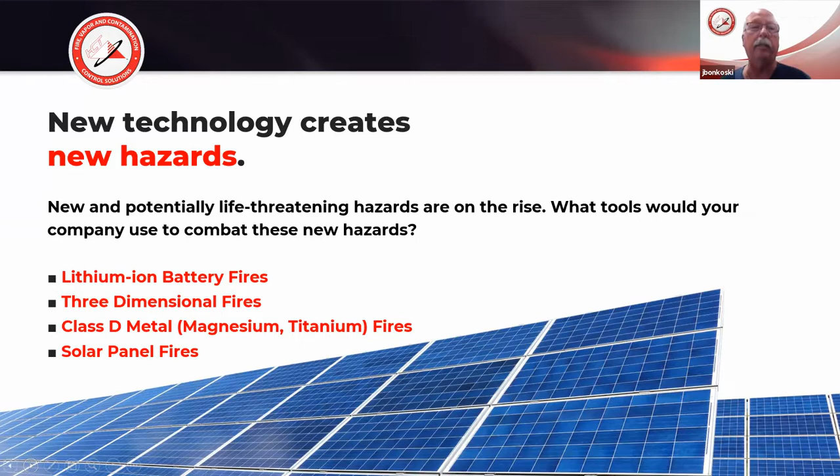So there's many applications. So when we start looking and thinking about these three-dimensional fire solutions, some of the things that we want to touch base on are the chemistry of fire and the encapsulator. What is an encapsulator? Hopefully we'll get that answered for you, the features of an encapsulator agent, some of the applications, and mostly today we're going to be discussing that three-dimensional application. So I'm hoping through this presentation to explain the differences between water, foam, and encapsulator agent, and give you a better understanding of just exactly what an encapsulator agent is and how it does in the different industries that we have an effect on.

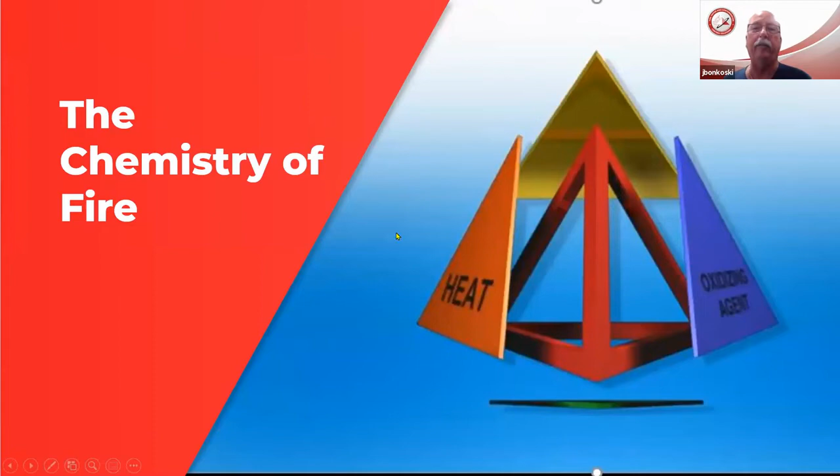Now, very long ago, when I first started in the fire service, I'm kind of dating myself, but we used to have a fire triangle. And through the years, we found out there's one other aspect, and it became the fire tetrahedron. I got a real quick video just to help explain that tetrahedron a little bit.

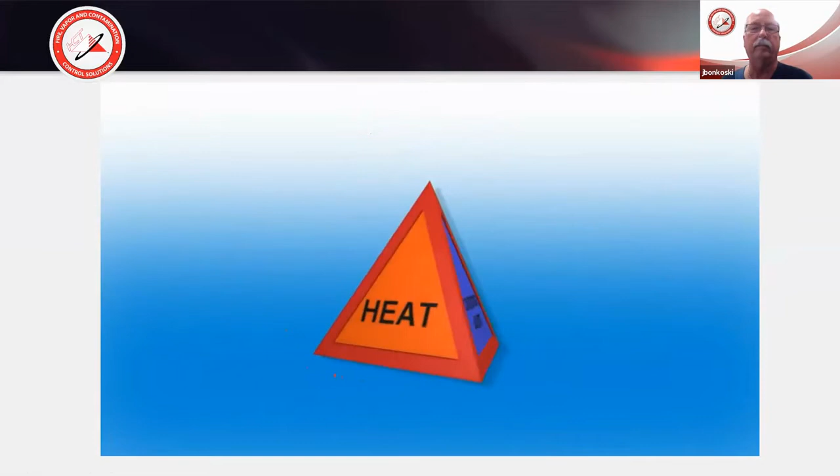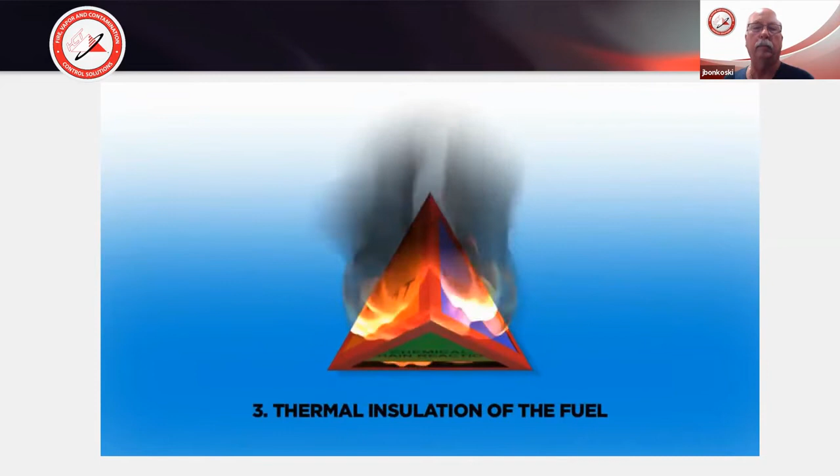The representation of a fire triangle has been replaced with a fire tetrahedron, because we now know and recognize a fourth element crucial to combustion, a chemical chain reaction. The four sides of a tetrahedron represent the four components of fire: heat, fuel, oxidizing agent, and the chemical chain reaction. If any one or more of these components are absent, a fire cannot occur. When all four components are present, fire will occur. There are four options for extinguishment: cut off oxygen, cut off fuel supply, thermal insulation of the fuel, and interruption of the chemical chain reaction. When one or more of the components are removed, the flame goes out.

Okay, so currently when we're fighting fires and we're looking at this fire tetrahedron, many times fire departments are using water. We're using water, we're converting it to steam and trying to use that steam to smother fires. It's really not a very effective way of trying to put out a fire. I mean, we're using millions and millions of gallons of water on some of our commercial structures and probably hundreds of thousands of gallons on some of our even residential fires.

So water is like 3 to 5% effective at being able to cool and extinguish. And when water doesn't work, we start looking at our foams, Class A foam for Class A fires and our Class B foams. And we're trying to smother the fire with these foams and create the blanket.

But again, what do we do when we're cold? We grab a blanket, we put it on. Well, we're doing pretty much the same thing when we use a foam blanket. We're not dissipating, we're not getting rid of the heat. So once that blanket breaks down, and that heat source is exposed to air or oxygen again, we have a rekindle, we have a reignition. So it's, again, not a really great choice.

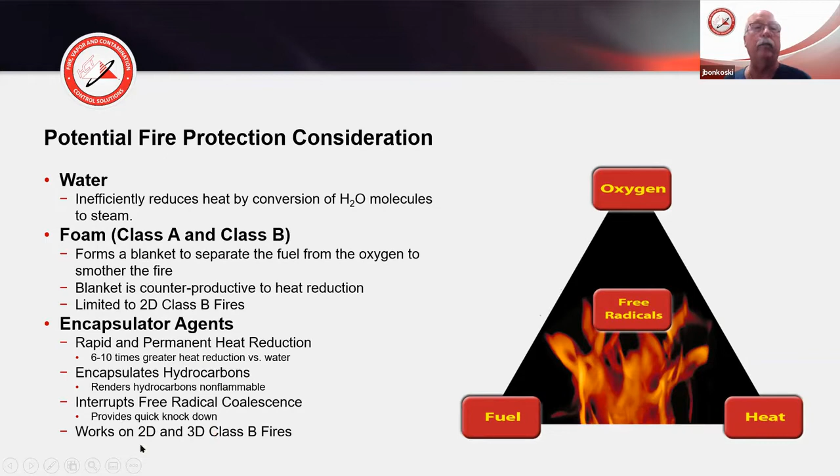So when we look at an encapsulator agent, things we're going to learn today are how we're able to rapidly and permanently reduce the heat. With hydrocarbons and polar solvents, we're able to render them non-flammable, and that interruption of the free radical coalescence, that fourth leg of the triangle or the tetrahedron. And we're going to talk about how these encapsulator agents work on three-dimensional fires.

So as I said, when we start looking at some of the agents that we talk about, one was water. Well, one of the additives we can add to it is covered under NFPA 18, which is a wetting agent. It makes water droplets smaller to help them get into pores or smaller areas, and reduces that surface tension. It works by the same mechanism: it converts water to steam.

When we look at foam, again, thin-wall bubble structures, very fragile. We have to be careful, especially with Class B fires, that we don't interrupt or walk through these blankets and disturb them, because the effects we're trying to accomplish are going to be reduced. It's going to allow flammable vapors to escape, and if they find a source of ignition, there's going to be a reapplication time. And we've found out from a recent incident that reapplication, because of the heat of the day, the temperatures, may be needed quite often.

And then we're going to talk today about the encapsulator agents that fall under NFPA 18A and how they're able to reduce that surface tension. We're able to encapsulate not only fuels, but vapors. And I often ask the question when I do some of these trainings, can anybody name another fire suppression agent out there that can suppress vapors, possibly preventing a fire? We'll see some of that in some of our other programs, but I'll talk a little about it today.

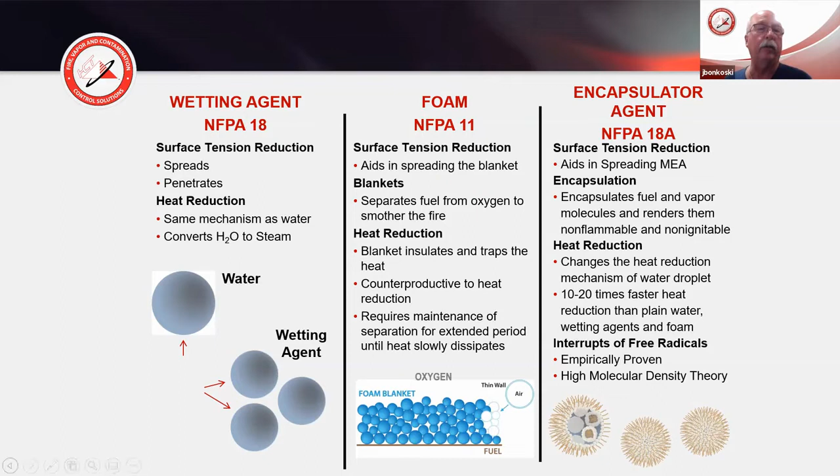And then that rapid change in heat, how we're able to drop temperatures 10 to 20 times faster. What's one of the main causes of reignitions when we deal with many of our flammable vapor or flammable gas fires? We have hot steel. We have that reignition potential. So if we can cool that metal, that steel, we're greatly reducing that reignition. So we'll see how we're able to rapidly drop those temperatures. And then the interruption of the free radical coalescence, how we're able to deal with those.

But first off, we start talking about foams and their ability to work on a two-dimensional fire, that pool fire. It's basically covered in the NFPA 11 foam standard. If you look in Annex A.1.1 of the foam standard, it states foam is not suitable for a three-dimensional flowing liquid fuel fire or for gas fires.

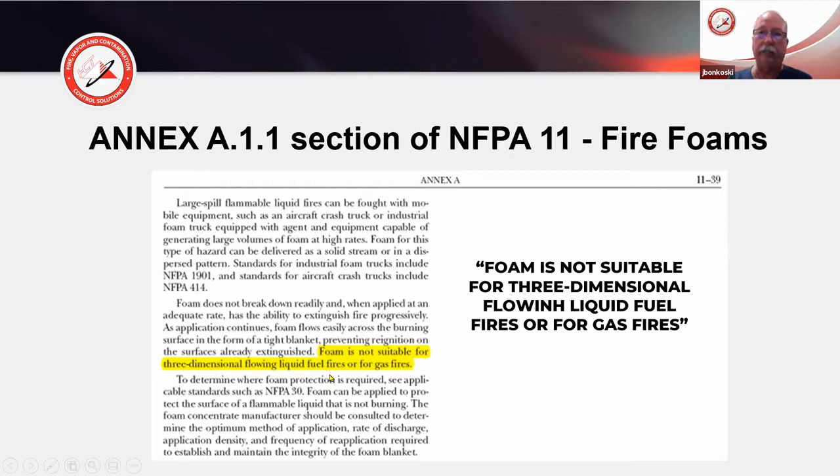And gas fires like LNG, LPG, and different types of gases—as I said, it's right here in the standard, it even states that those are not suitable. So we'll talk about the difference, about how encapsulator agents can have that effect on those.

So to start with, let's learn a little bit about what an encapsulator agent is. Back in 1996, we acquired the patent rights for this water additive with superior cooling effects, and we find that it's very effective on pretty much all classes of fires. We're finding out with current testing going on with HCT Europe, Johnson Controls, and others that we have a great effect on being able to extinguish and stop thermal runaway in lithium-ion batteries. We work on those pressurized three-dimensional fires. So it's an agent that works on all these classes of fires.

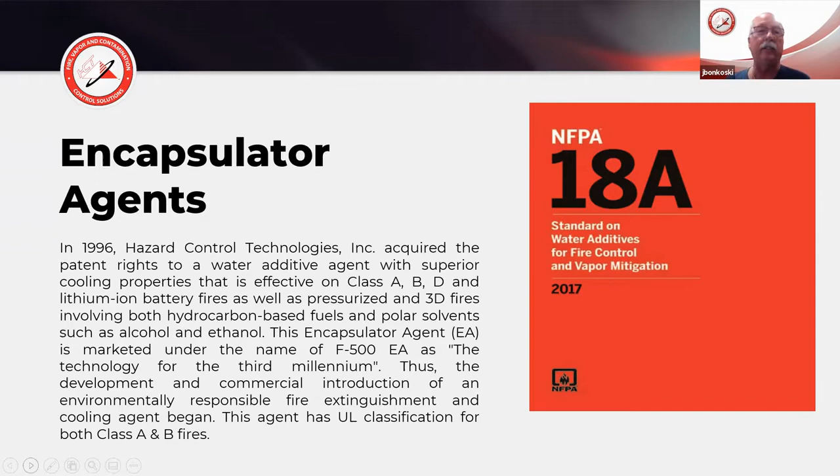And while we seem to have, I guess in the fire service, a history of not wanting to adopt change, here we have an agent that can help us in dealing with all of these types of fires. And now it's a problem—I shouldn't say a problem, but a matter of us getting out and hopefully getting people educated on how this agent works much differently than all the others that we're used to. When we look at it in the standard, there is a section, and it's covered in section 7.7 of the NFPA 18A.

It's called a spherical micelle stability test. And if we think about foam, when we look at our different classes of foam, we have foam tests, and what we're doing is checking and testing the stability of a bubble, a thin wall bubble structure, and being able to suppress vapors. Well, we're not making bubbles—we're chemically changing the makeup of a water droplet, and in doing so, we're making spherical micelles.

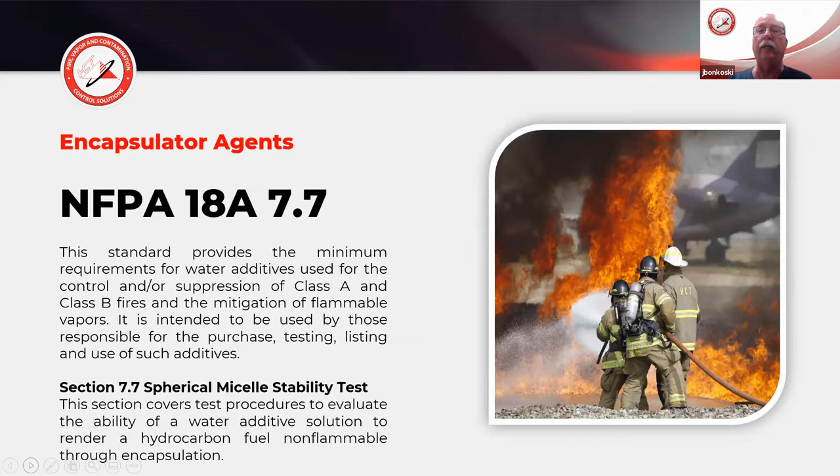And real quick, what is a building block of our water, or an encapsulator agent? The building block of an encapsulator agent is these spherical micelles—that chemical change of a water droplet, and how it's able to affect not only our hydrocarbons, but we're able to deal with both polar and non-polar. And again, I bring up that vapor molecule. So when we look at encapsulator technology, the next generation of fire and hazard mitigation.

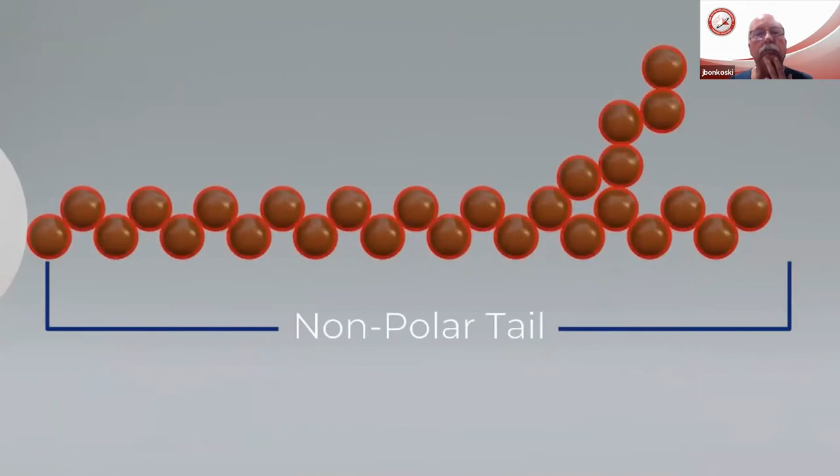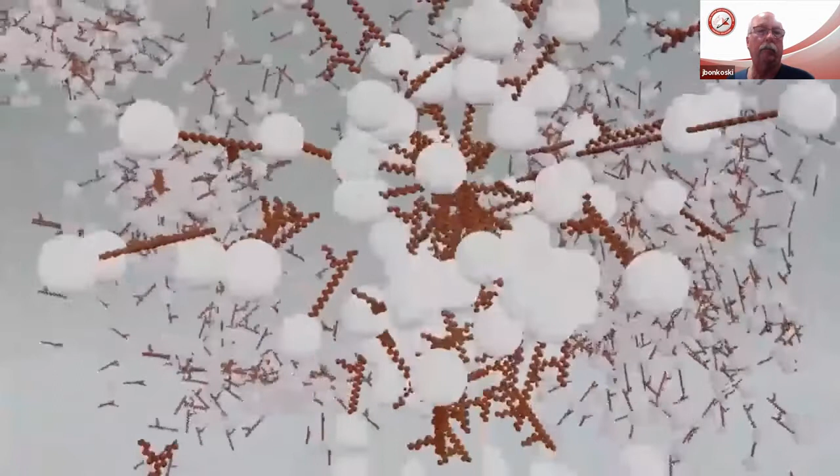First, we start with a simplified version of a single encapsulator agent molecule, consisting of a hydrophilic polar head which loves water and dissolves in water, and a hydrophobic non-polar tail which fears water and will do anything to get away from water. Once the EA molecules enter the water, they instantaneously and automatically orient the non-polar tails inward and the polar heads outward, forming millions of spherical micelles.

Micelles travel towards and exit the nozzles, forming EA droplets. Micelles nearest to the surface of each droplet automatically break apart. The non-polar tails orient outside the droplet, with polar heads on the surface, forming an EA skin on the surface of every droplet. In addition to the EA skin, there are millions of molecular spherical micelles within each droplet.

As that video showed, there are millions and millions of micelles inside of each and every water droplet. To give you an idea of how many micelles are inside a droplet: if a water droplet was the size of the earth, those micelles inside would be about the size of a pea. That's where we'll gain an understanding of how these micelles work and are able to encapsulate your hydrocarbons, your polar solvents, and once they get encapsulated inside of the water droplet, how they're able to render them non-flammable, non-ignitable.

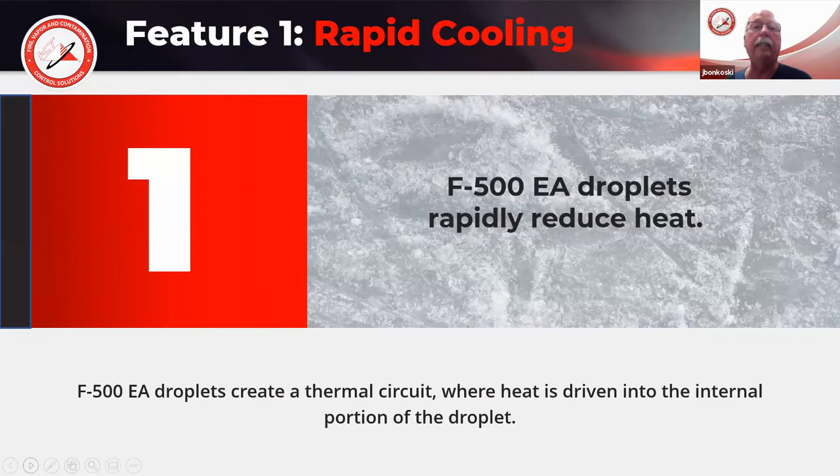So when we look at how encapsulator agents are able to reduce these high temperatures, this is a real quick video that helps to explain it. In this video, we've got a person with a blowtorch, heating this steel up to 1200 degrees with an acetylene torch.

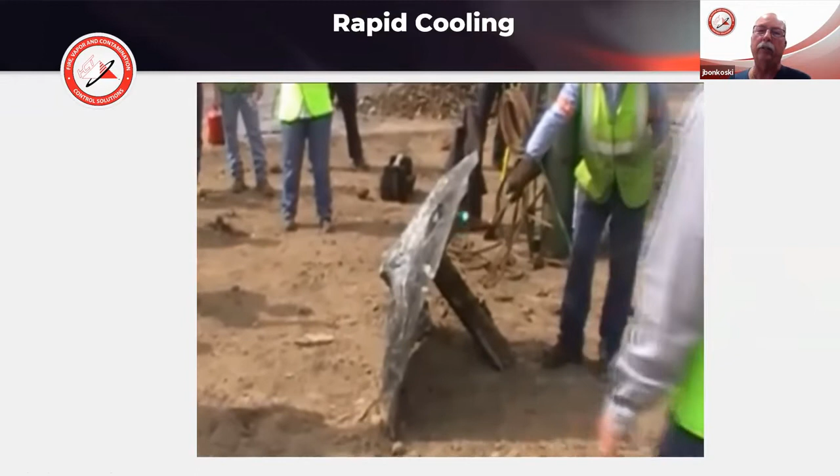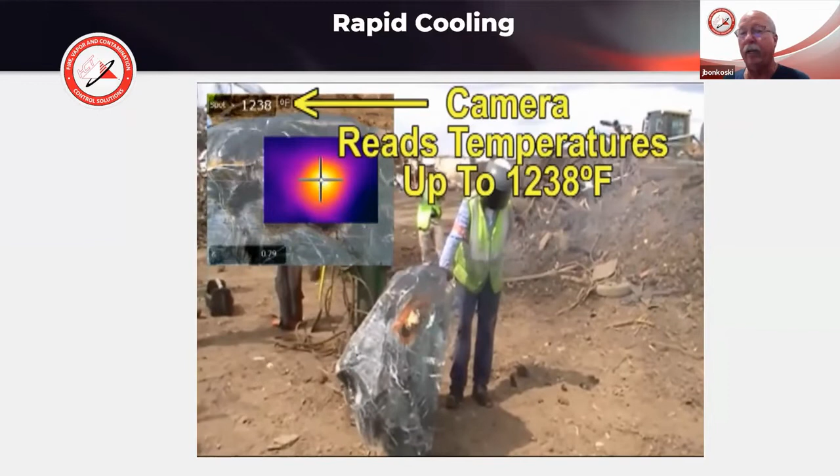Unfortunately, the thermal imagery they're using stops reading temperatures at about 1230 degrees. It doesn't read much higher than that. But as you can see from the bright, glowing red, and the paint on the hood starting to burn, we have a really hot spot going on this particular hood.

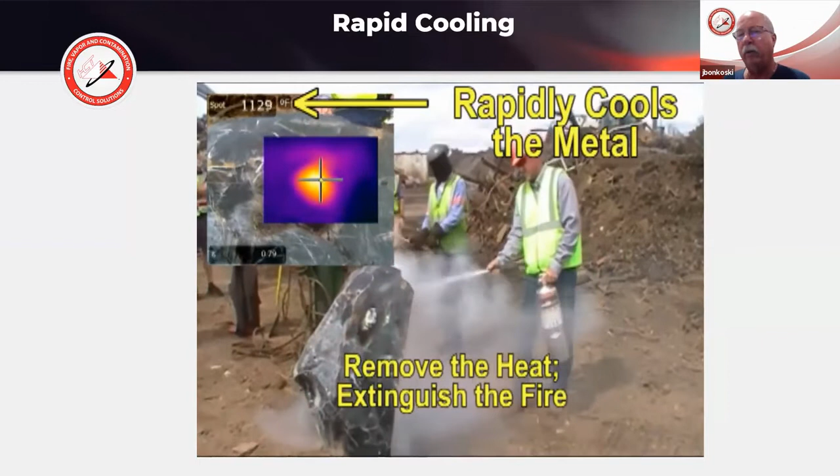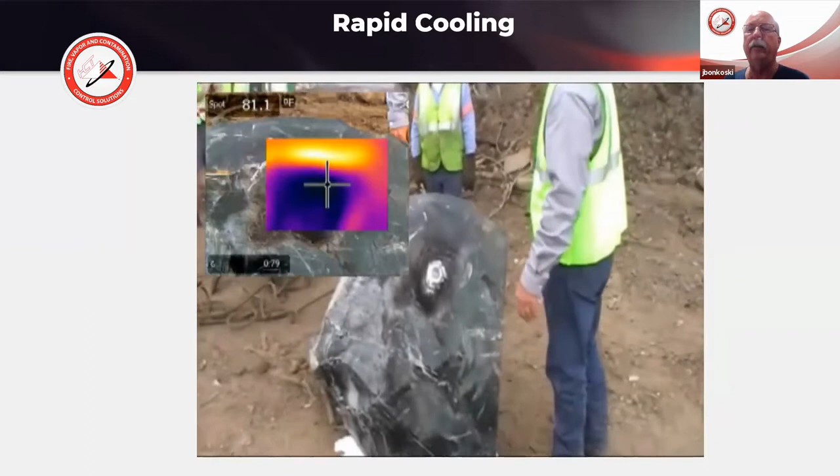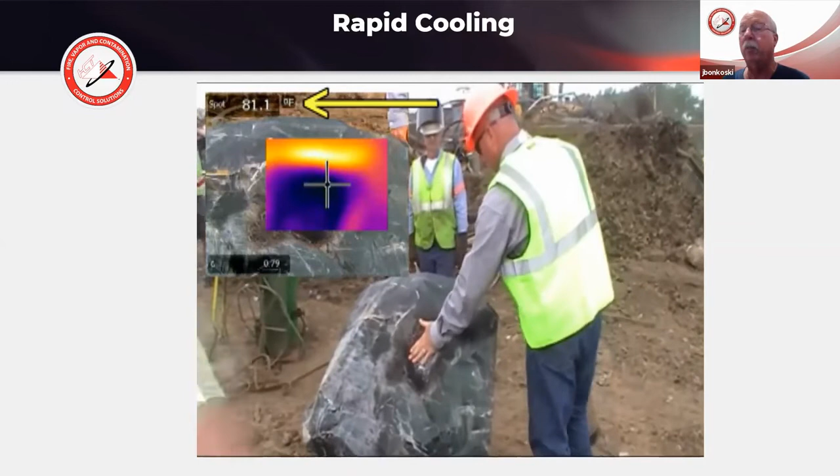One thing I want to point out as he starts spraying is this white mist coming off. He's bare-handed. There's no steam - it's not steam he's creating, because of how micelles and those water droplets work. Within a matter of seconds, using a very small amount of encapsulator agent, F500, he's been able to cool that from in excess of 1100 degrees down to less than 100 degrees, where he's able to put his hand on it.

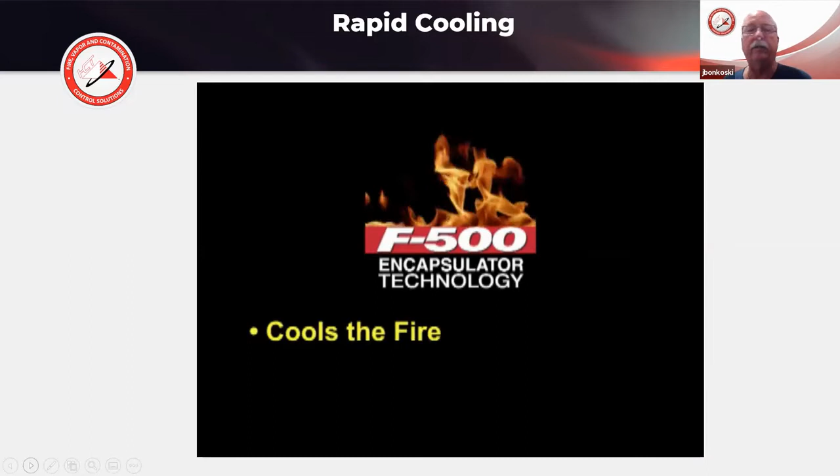So again, when we start looking at these reignition sources, if you're dealing with some type of three-dimensional fire involving flammable gases or liquids, the metal structure is just a source of reignition.

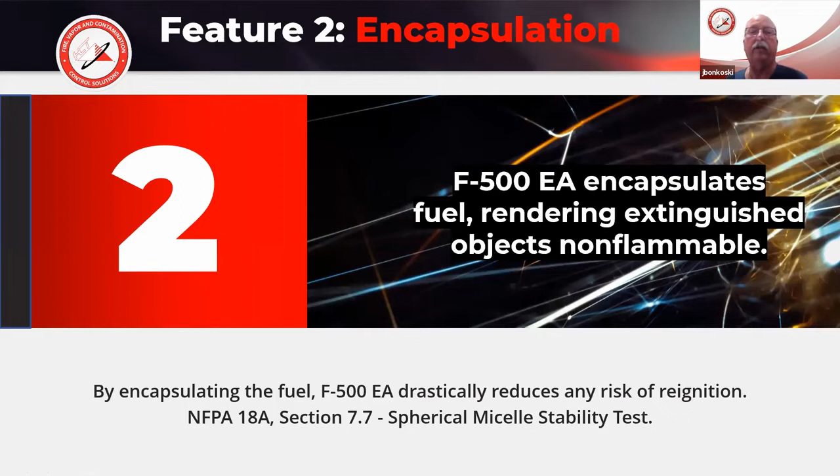So the next thing we want to discuss and help you understand better is encapsulation. How is it able to encapsulate fuels and render them so they can't be relit?

In order to understand that, there is a formula: 1 part F500 encapsulator agent, 8 parts fuel, and 40 parts water minimum, plus kinetic energy. So it's a 1-to-5 ratio.

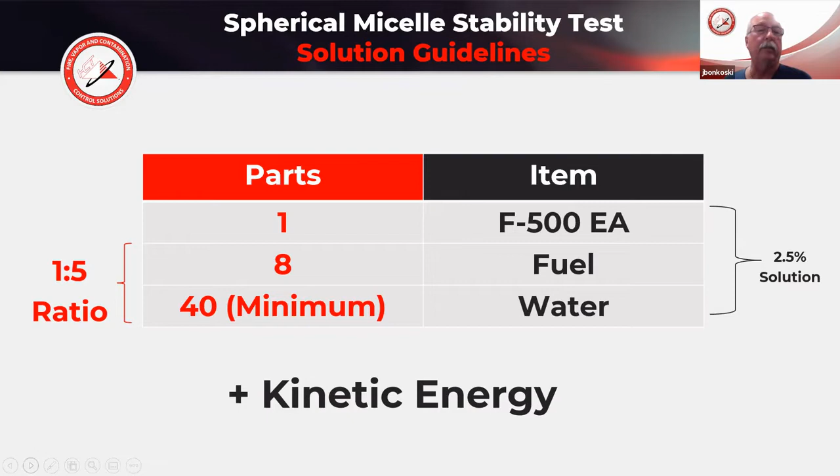We talked about this in a slide a few minutes ago - NFPA 18A, section 7.7, the spherical micelle stability test. Here it is. To give you a better understanding, we're demonstrating the NFPA section 7.7 spherical micelle stability test.

In that test, you take your test fuel - in this case gasoline, though it could be heptane or ethanol - and we're pouring 1 gallon of the fuel into the test pan.

16 ounces of the encapsulator agent being tested, with a calibrated 5-gallon-per-minute nozzle, we're going to add 5 gallons into this mixture.

So basically we're going to add water for 1 minute, mix it around, and agitate the mixture all around.

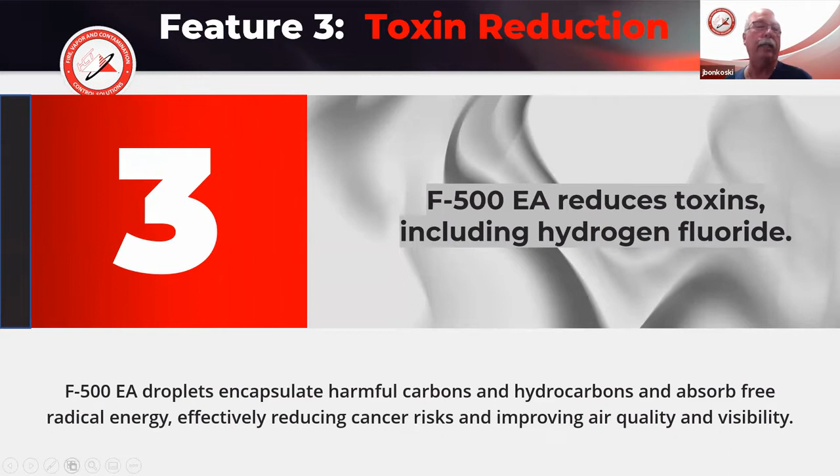The next thing we want to talk about is the ability of an encapsulator agent to affect free radicals and coalescence - how black smoke turns white and how it's able to reduce toxins and soot. This comes from a test done by Clemson University.

They were using a fuel source, toluene, and built an inverted funnel. They looked at three things: light transmission through the smoke column, the buildup of soot, and the toxicity of the soot. They used water as one source, and then a 3% mixture of F500 encapsulator agent.

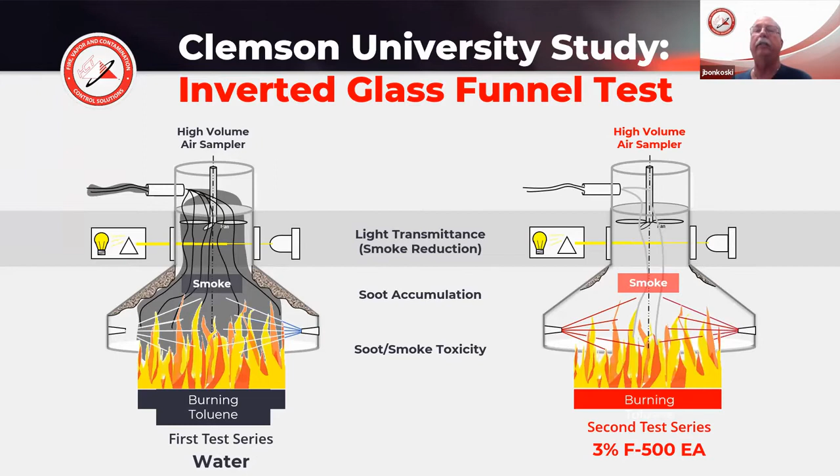And when they did the test, they found out that when they used Encapsulator Agent F-500, they were able to increase the visibility through the smoke column by 68%. That buildup of soot on the sides of the inverted funnel was reduced by 97%, and the toxicity, the toxins, were reduced by 98.6%.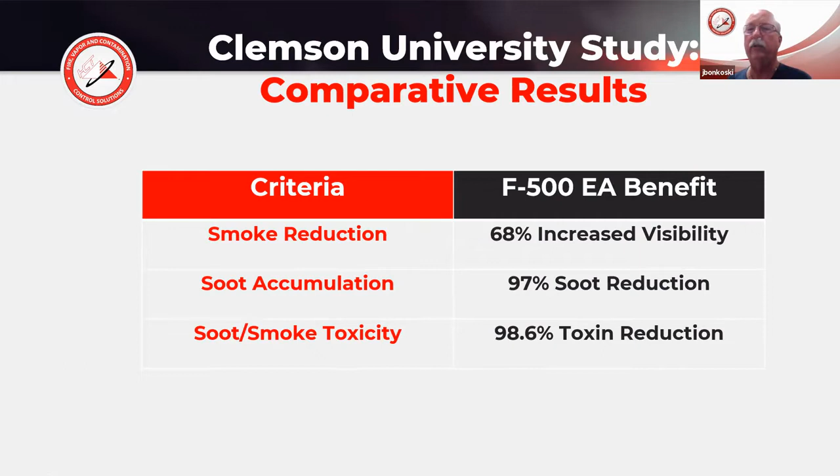So when we start looking at cancer in the fire service and our exposures to these toxins, some of these industrial fires, let's think about this. Here is an agent that can help reduce our exposure to these carcinogens and toxins.

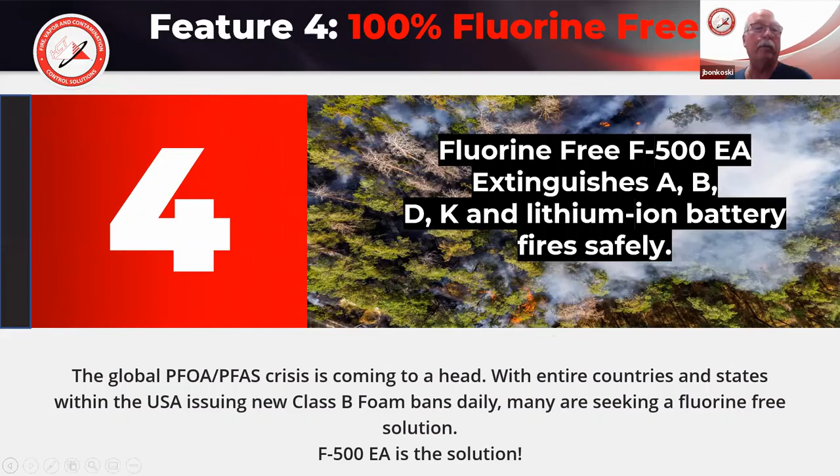And we're fluorine-free. We're going to talk a lot about this, because PFOS and the PFOAs, it's being more and more publicized. Many states and countries are coming down and becoming more strict and trying to reduce this. And we're going to see just how big of a problem this is when we look at our use of Class B foams on three-dimensional fires, which they're not suited to put out, as the NFPA standard stated.

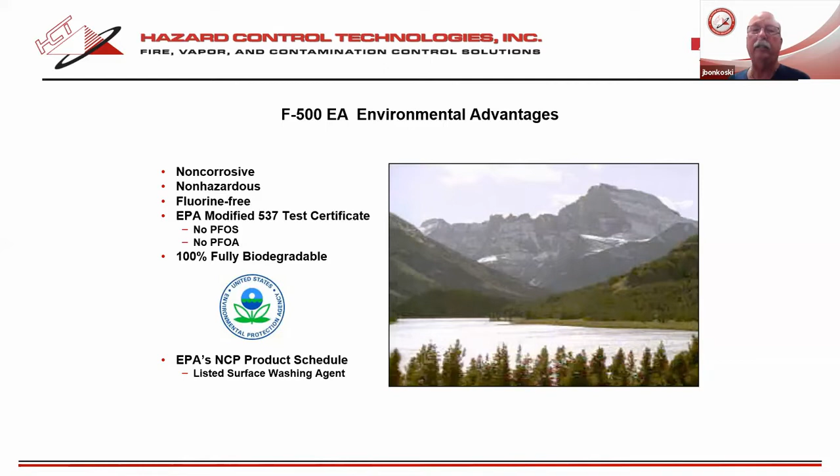So when we look at F500 Encapsulator Agent, the advantages are: it's non-corrosive, non-hazardous, and fluorine-free. In fact, it's been tested to the EPA modified 537 test, testing for perfluorinated ingredients, and there were none detectable of the 25 tested for. And it's 100% biodegradable, it doesn't stay in the environment. We're on the EPA's National Contingency Plan, listed as a surface washing agent.

So when we start looking at foams, the problem is those forever chemicals, as we're starting to call them, the PFOS and the PFOAs, and all the different reports and concerns.

This started in 2009, but really started well before this. Many countries are starting to ban the production of any new products that have PFOS-based products in them, and 3M was one that basically blew the whistle on themselves back in 2002. But in the published reports, we're finding out that firefighters are greatly affected by these forever chemicals in the foams, and we have to start looking at these fluorinated surfactants in our bloodstreams.

And here was an example: the United States paid out millions of dollars for treatment of a water treatment system for residents that were downstream.

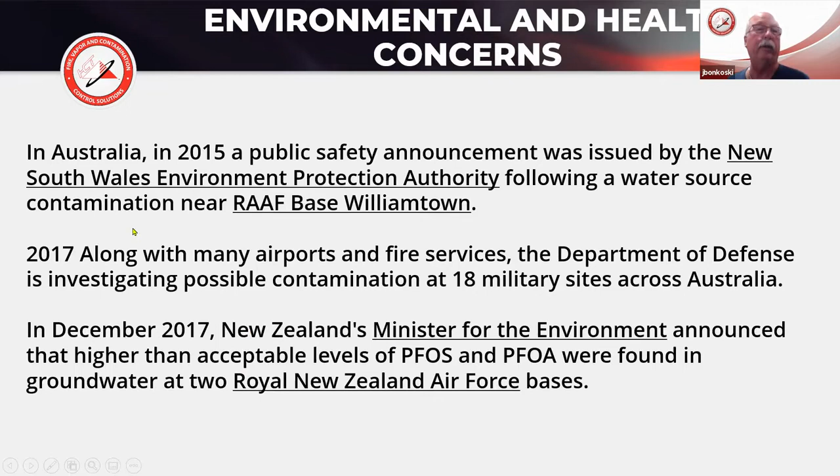Australia - so this isn't just a problem here, this is around the world. Here we have Australia talking about their environmental protection and water sources. Again, we have an Air Force base in 2017. Defense and New Zealand, the minister, with the PFOS and PFOAs at higher than acceptable levels.

So when we start looking at this, what is, I guess you could say, an acceptable level? And here we're going through - there are hyperlinks on these articles, so feel free to look some of these up, but these are some really good ones.

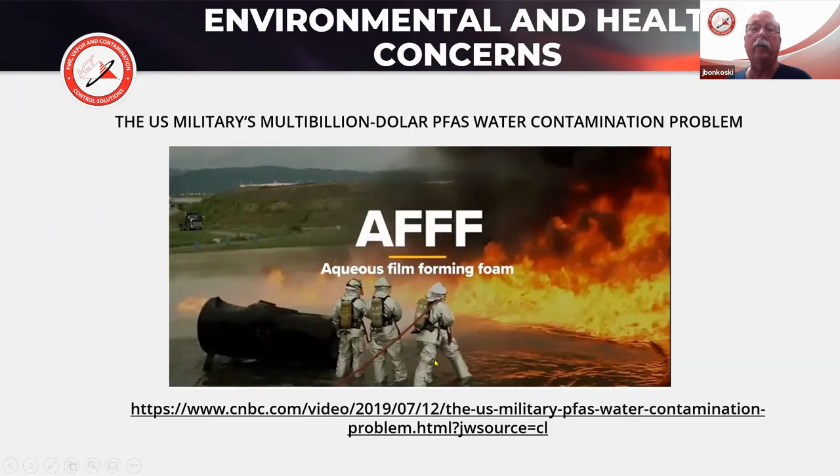But when we look at the military - and I shouldn't just pick on the military, because we have many areas of the country where we even have airports, and our airport vehicles and training has to take place. It's regulated, where they have to do training on an annual basis. So in the past, they've been going out with their fluorinated foams and doing these trainings, leading to multi-billion-dollar cleanups.

And again, with firefighters - once the Navy developed these foams, they were taken on also by the fire service as a way to deal with some of the difficult fires we're faced with.

So we go through and look at all of these different articles, people coming out and trying to remove these foams from their countries and get them out of the environment - while they've been around for many years, and we've talked about it being a forever chemical and how it's affected firefighters.

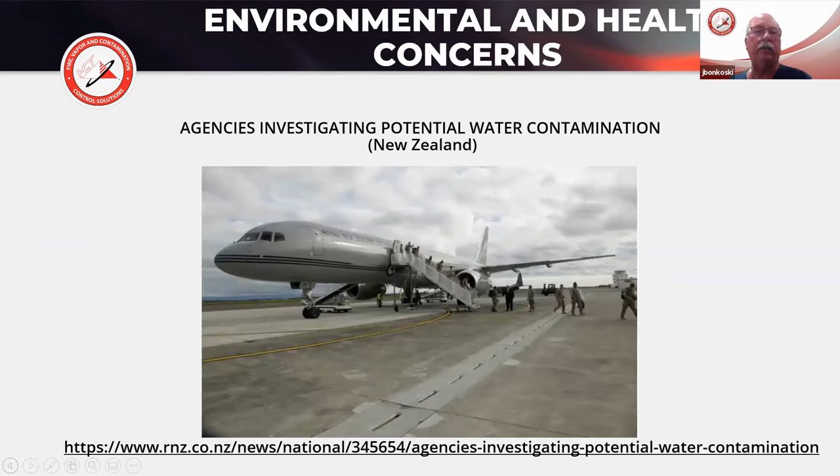Well, when we start looking at all of these different areas around airports and so on, one of the things I want to point out is here's one again in the United States - Cannon Air Force Base, by a dairy farm.

Right now, currently, 12 to 15,000 gallons of milk a day need to be disposed of because of the contaminated drinking water. Well, for how many years before the PFOS and the PFOAs were detected, how many gallons of milk went to market where people were drinking? Okay. And again, it's bioaccumulative. So once it gets into our system, basically we're maintaining it.

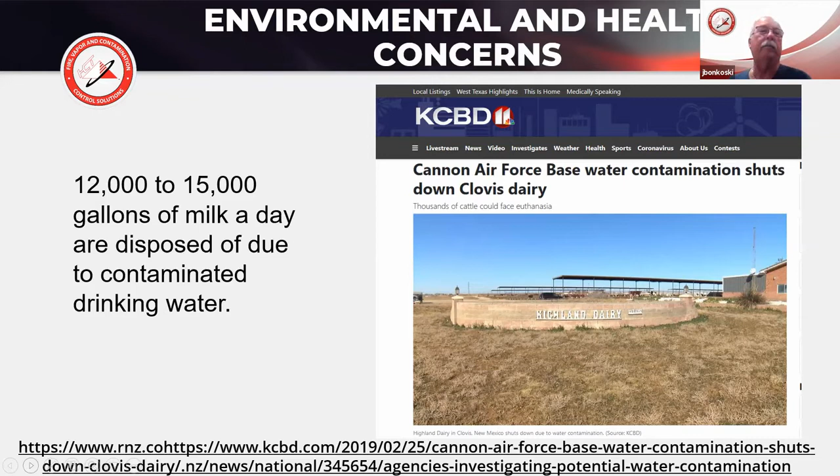And while many in our trade magazines talk about cancer, there's many, many more health effects that have been found to be caused by being exposed to or getting these chemicals into our systems. So, you know, it's not just air bases, it's not just airports, it's not just firefighting, but it's all the other areas. It gets into waterways, it gets into fish.

We've got air bases where there's a 5-mile radius around the air base, do not eat deer. So the effects to all of us because of these chemicals is worldwide, and it's everywhere. We really need to have more awareness of what we're exposed to on a daily basis. So as I go through again and talk about the applications, we're going to start getting a little bit more into that three-dimensional side of things.

But you know, we're dealing with all of the different classes of fires that we're able to work on. Your lithium-ion batteries, we hear in many cases that lithium-ion batteries are difficult to put out. Well, we go through this. This is an introduction video to an encapsulator agent. And one of the things you're going to see is it works on all classes of fires.

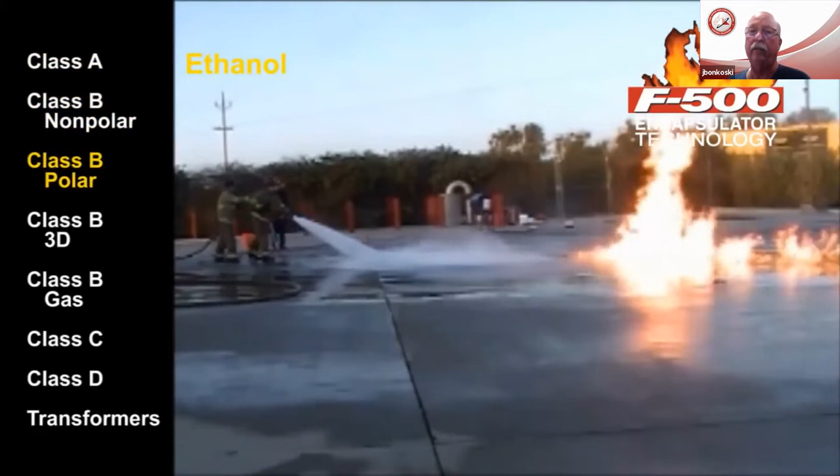When we talk about foams, they have 3 application techniques: rain it down, bank it in, roll it on. As you see in these videos with Class B fires, there's no special application technique. We saw in NFPA 18 Annex A11, foam's not suitable for three-dimensional fire, but yet an encapsulator agent in just a few seconds is able to very quickly extinguish it.

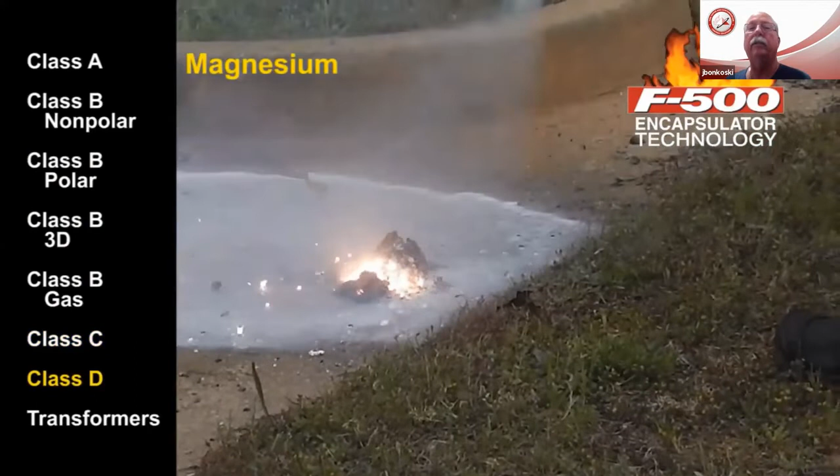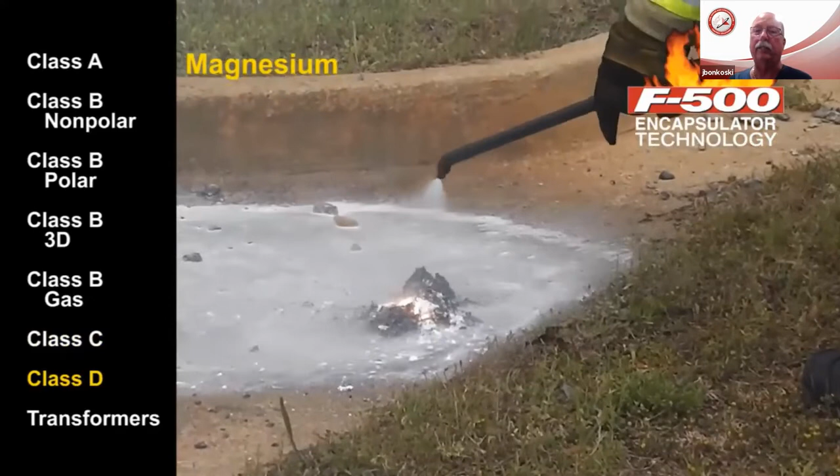Now, again, how about that flammable gas that foams weren't able to? Our Class C energized batteries. And one of the things I point out is he's using short little dispersants of the agent. He's not using a constant spray. Your Class D metals. Okay, no explosion because it's not truly water that's coming in contact with that Class D metal. It's that spherical micelle that's put that cocoon around that water droplet.

Tank farms, pipelines. In doing some reading on some of these different tank farm fires that have occurred, it could have been something as small as a manifold. The problem is foam doesn't work on the three-dimensional aspects of a manifold fire. But we just saw that jet engine cowling being extinguished with an F500 encapsulator agent in seconds. So if an F500 encapsulator agent was available and used on a manifold fire in a tank farm, it could have prevented some large tank farm fires. So it's a huge benefit.

And when I'm starting to show these videos, these firefighters are not doing anything wrong. Okay, the problem is they're using foam, which is designed for a two-dimensional fire, on a three-dimensional fire. And when we start looking at, if there's a hole or a leak where water can get into that tank, what's it going to do? It's going to cause that gas in the tank to be displaced and spread out.

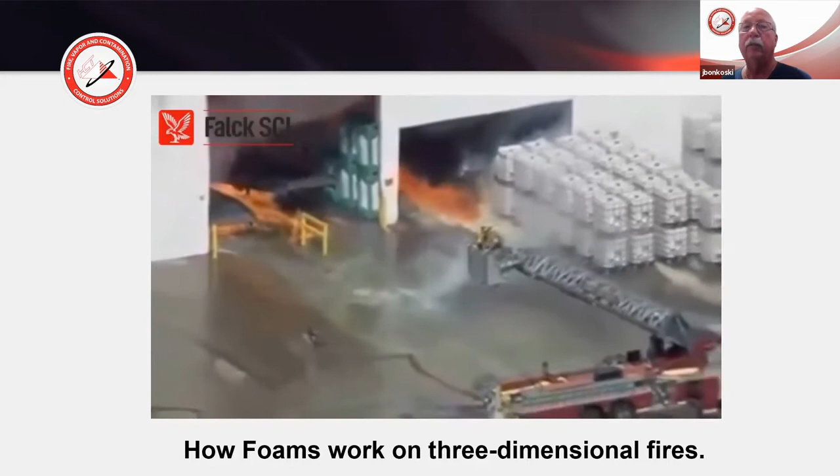Foam, we'll get into our different expansion and different types of nozzles to help aerate and create thicker blankets. Again, we're dealing with a three-dimensional fire. So while foam eventually may be able to extinguish a fire like this, look at the contamination being caused. Look at the area where all of that foam is being spread across the surface of the ground, getting into sewers, getting into groundwater systems. Foam again. Here we have a three-dimensional fire.

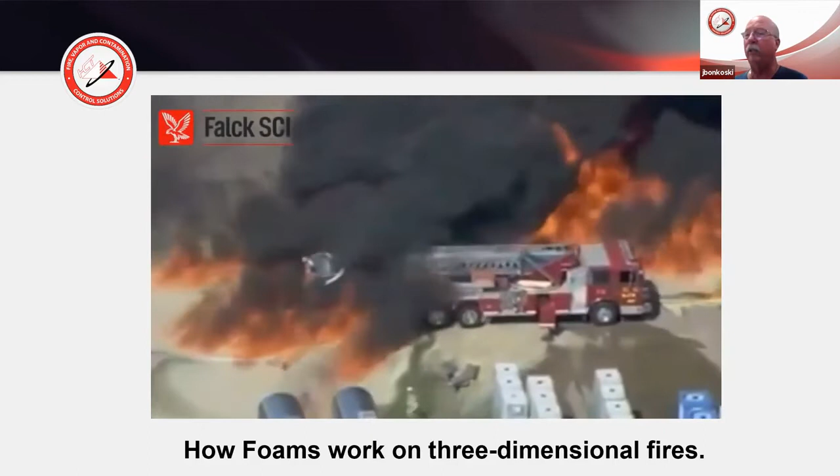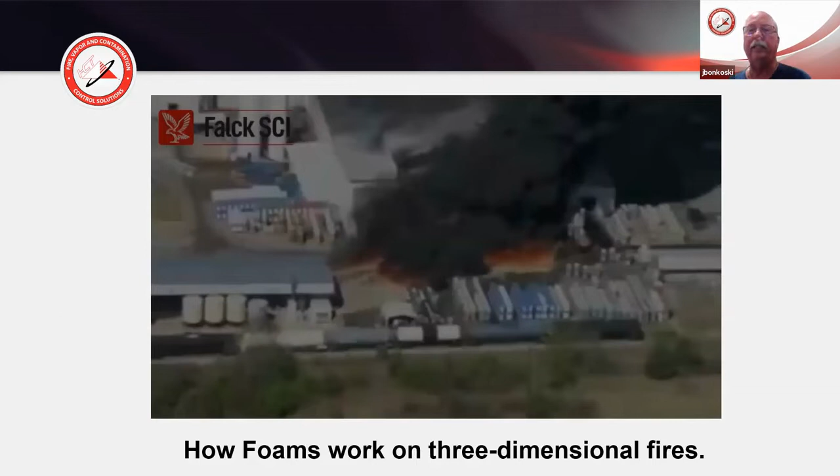So as we sit there and we start using foam and we start adding more, what's the fuel going to do? It's going to start floating on the surface. So now what may have been a small fire inside of a plant or inside of a facility, we sit there and we start using our foam, and next thing you know, we have all of that fuel burning up, and there goes a $1 million piece of equipment that the firefighters use.

One of the other methods that we're going to see, and applications are used many times with the ARFF vehicles, is a dual agent. In order to be able to extinguish these three-dimensional fires, they're using foam to work on the two-dimensional aspects and trying to create a blanket. And as you can see, the application, he's trying to rain it down and get that footprint built and trying to get it extinguished, building up enough foam on there to smother that fire out.

But if there's a three-dimensional aspect to the fire, it can make it very, very difficult. So what they will do is, you'll see here in a second, you're going to have a gentleman come in and he's going to have a dry chemical, and he's going to try to assist in using the powder to help in extinguishing this fire.

And that's the same technique that if we watch videos from some fires where jet engines or aircraft may be involved, jet fuel may be involved, they're going to be using dual agents and trying to suppress those types of fires. Yet, we just saw with that video of the jet engine cowling and some of those other videos, how effective an encapsulator agent is, being able to cool the steel and being able to extinguish the fire.

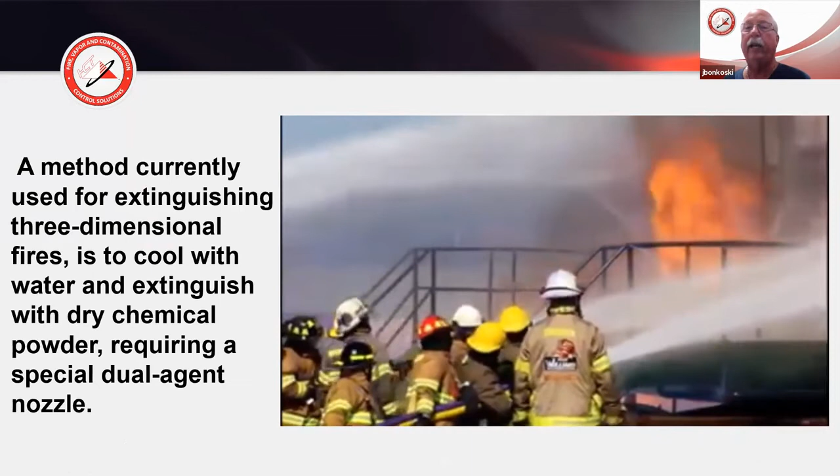Another example, we have a couple of different nozzles going on, a couple of different agents going on this particular three-dimensional fire. And look at the difficulties that they are having in trying to extinguish, even though they're using these dual agents. But now let's look at the effectiveness of an encapsulator agent and how quickly we can extinguish some of the same types of fires.

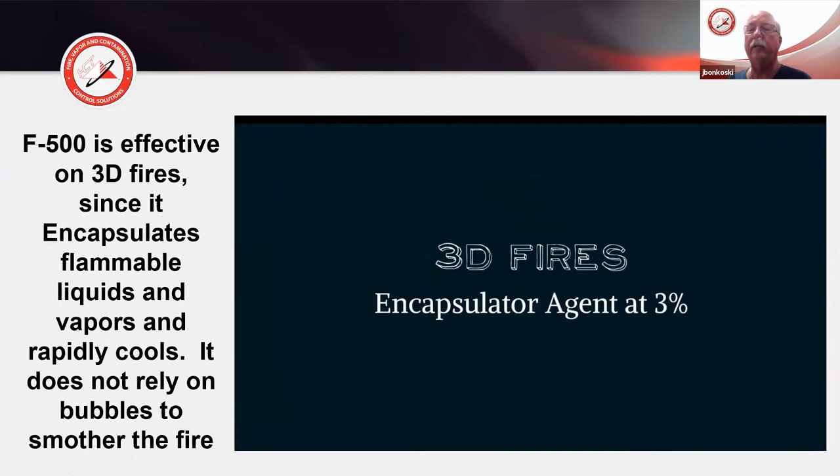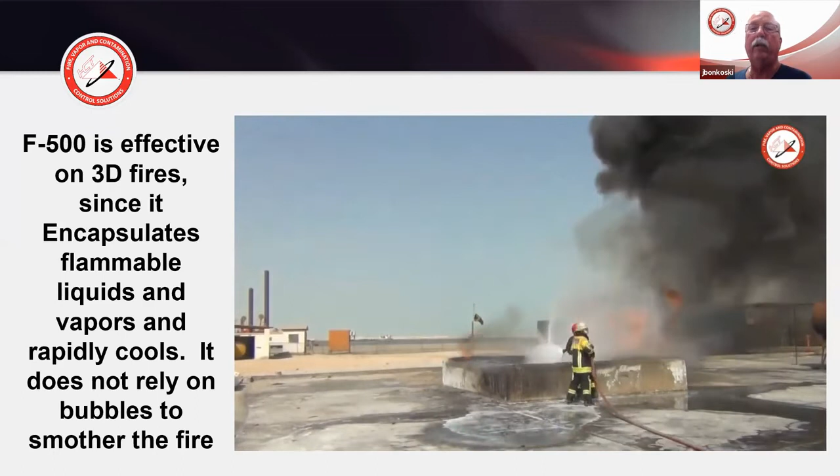Here's a distillation column. Okay, seconds. Here's like a well blow-off valve. Again, we're not using big water, one hand line. Instead of 4 or 5 trying to put out, we're using one hand line. Okay, look at the effect and how quickly they're able to deal with that three-dimensional fire.

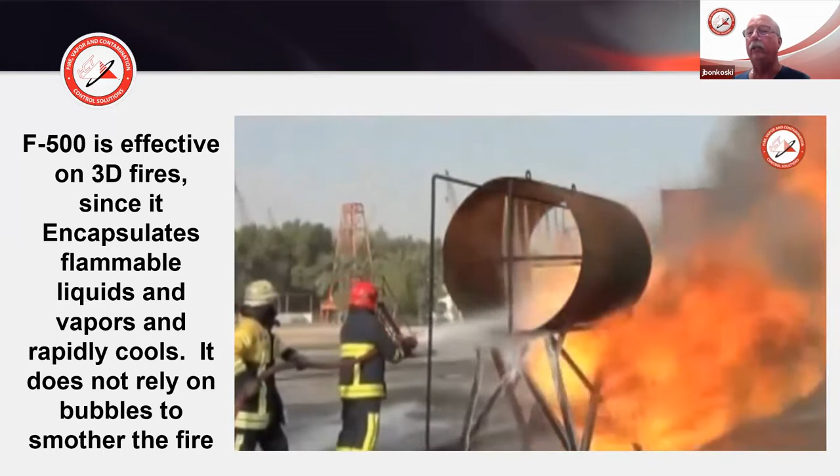While we have seen this one, a mock-up of a jet engine cowling, 27 seconds. He's able to work, and he's doing two things. He's working not only to encapsulate the fuel and being able to extinguish that fuel, he's also cooling the steel. And watch, he gets his fire out, and that jet fuel is still flowing. So it's not that the fuel was shut off so he could put it out. He was able to put that out with the jet fuel still flowing.

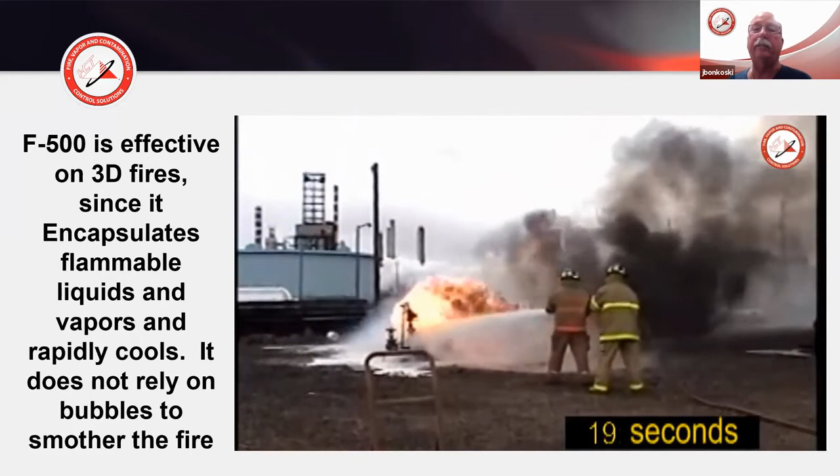I talked about the manifold. Okay, here's again, just one hand line. We're not using dual agents and multiple hand lines, multiple master streams. I mean, we have one hand line and we'll be able to deal with these types of fires. LP gas. Now, how quickly. Some of our different types of tanks.

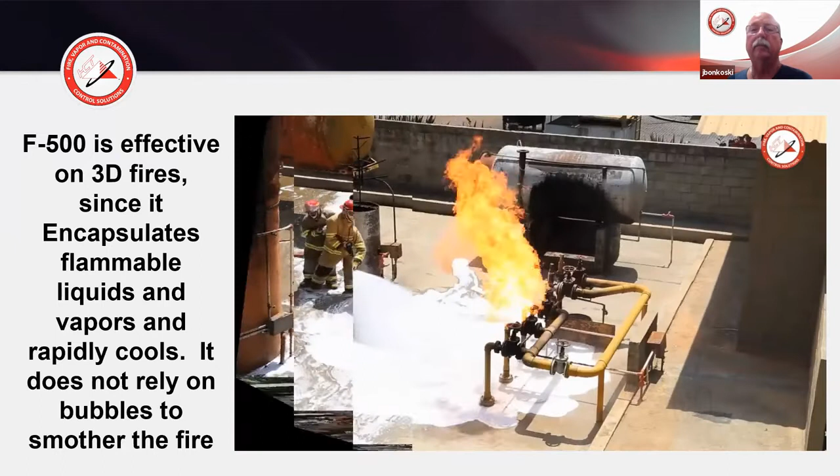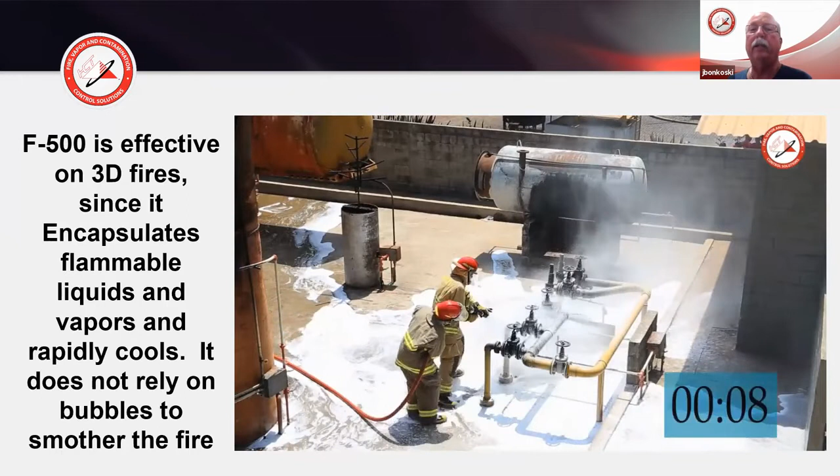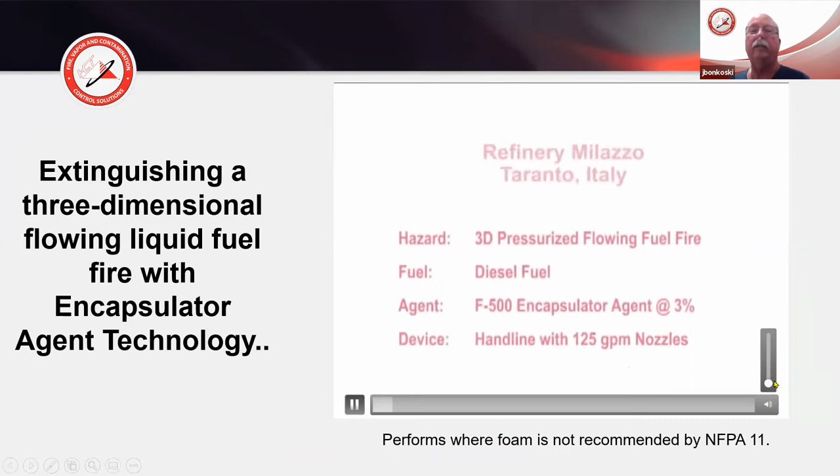Again, that manifold. And while he continues to flow the F500, he'll continue to encapsulate that flammable gas while he's able to then reach in and shut the valve off, possibly stopping any further gas from getting out. When we look at some of the other, but here we have, again, an example at a refinery, some testing. This is a three-dimensional inclined plane where they're using diesel fuel.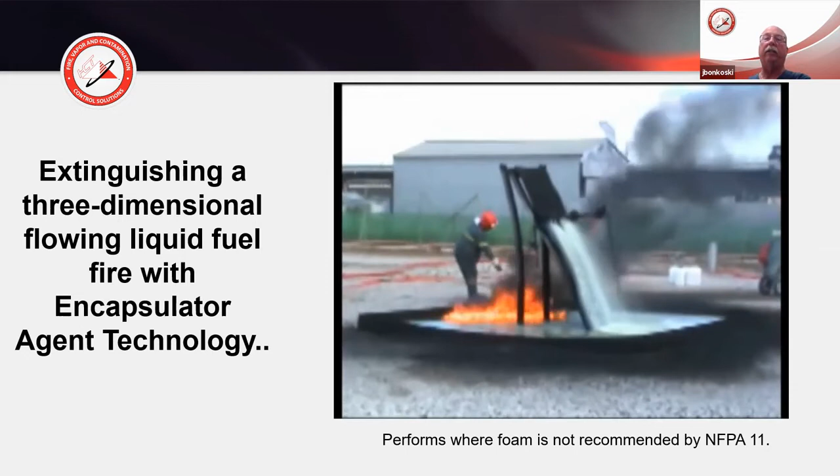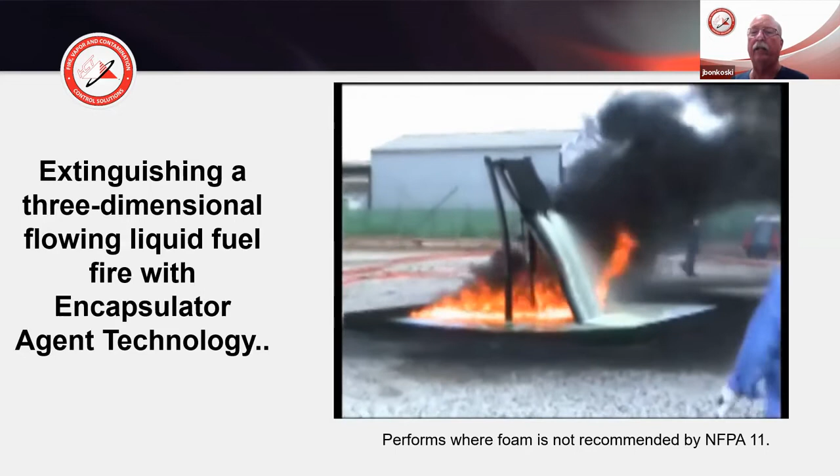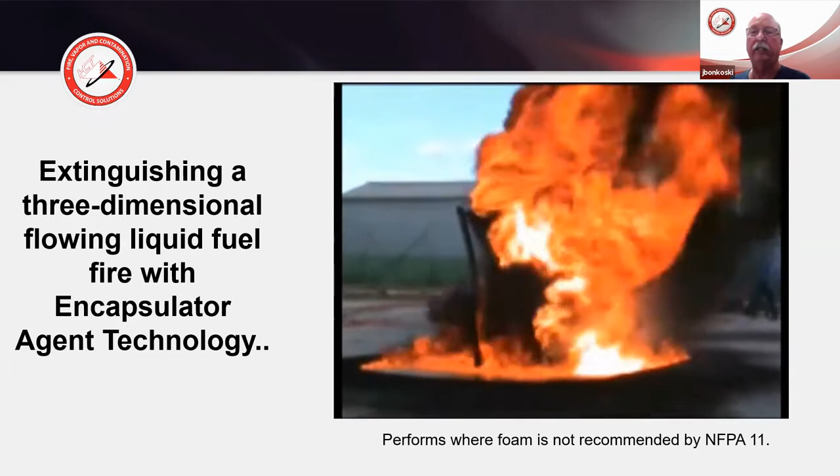So where the foam standard talks about not being able to extinguish this type of a fire because it has a three-dimensional aspect to it, we're looking at the need for that dry powder to assist in being able to extinguish. And you're going to see, again, some of the technique that's being used as they start using an encapsulator agent, F-500, 125 gallon per minute nozzle, just one single nozzle. We're not using multiple lines, but again, he's working on doing two things. He's working on encapsulating the fuel and the vapors and cooling the steel, which is a reignition source.

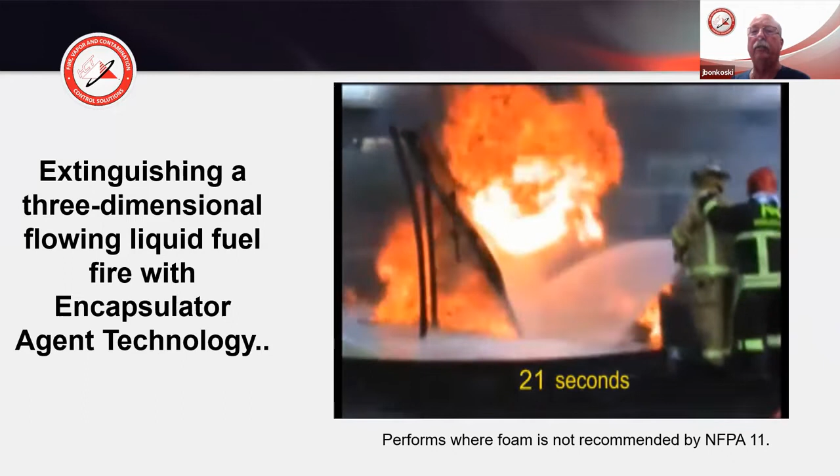And as you notice, as he sits there and starts cooling off and he starts extinguishing the plank, he then sweeps down and starts hitting the pool, which is that reignition source after he cools the steel. So he gets in there and he starts getting on an angle where he can get all of it at one time. He cools that plank, he cools it down. Now he quickly starts sweeping around and he puts that fire out in 35 seconds.

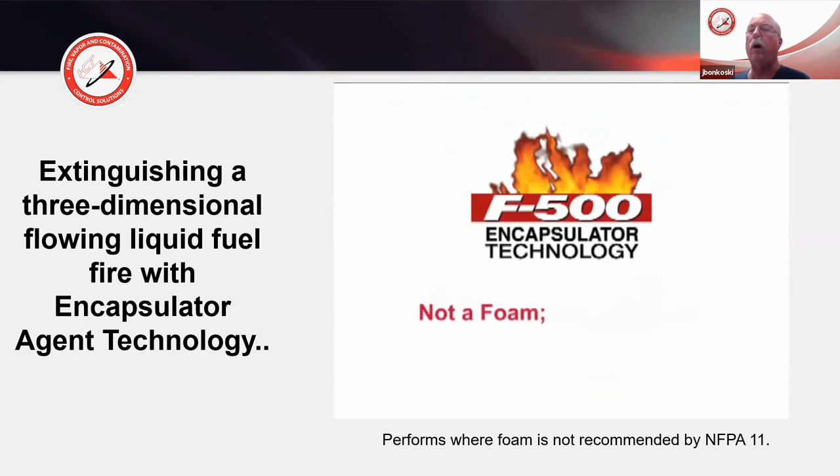But yet, how many hand lines did we see where they were using water and Purple K or some other type of a dry powder, 3-4 lines, and they were having difficulties in trying to put out that column, that distillation column. So this was some testing or some work that was done and

I'm going to turn that off.

But it's showing the difference between foam and encapsulator agent. When they're sitting there and they're hitting the fire, as you can see, they're starting to hit the fire before it really gets a chance to get burning really, really well. They're keeping it cool and trying to keep it somewhat under control.

If you look at the side with the encapsulator agent, they've kind of let that grow and get pretty good size. But yet when they start attacking it with the encapsulator agent, look at how quickly they're able to extinguish that three-dimensional fire. Two hand lines, same as the other. Within seconds, with the F500, they've been able to extinguish that tank fire.

Now, like I say, they've got the hose lines trying to keep it cool and trying to keep the fire small so that as they come in with the foam, hopefully they can extinguish it. And as you can see, the difficulties that they're having. Let's refer back to that Annex A11. Okay, foam is not suitable for being able to extinguish this type of a fire.

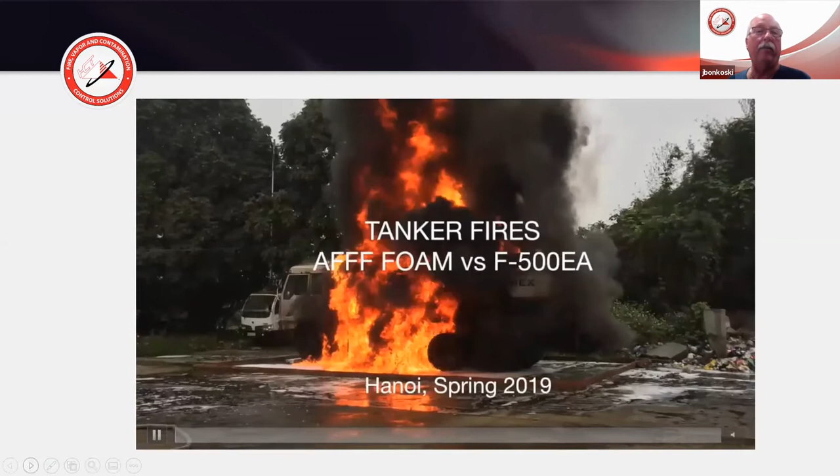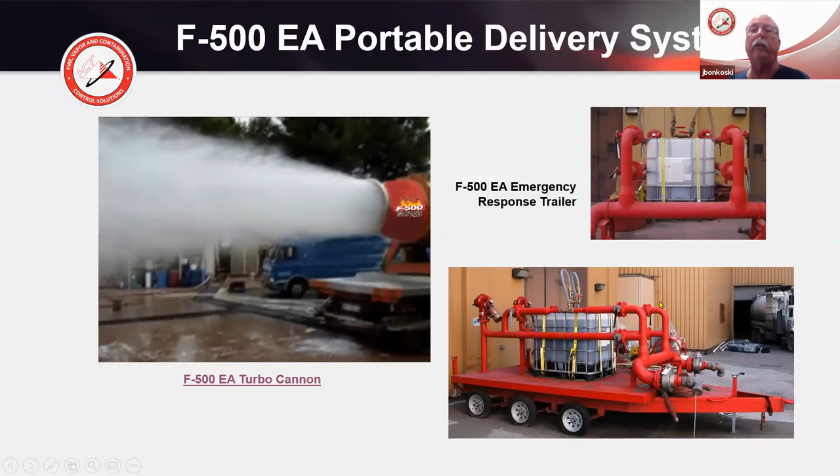So that's a huge difference when we start looking at foam versus your encapsulator agent. Here we have a turbo cannon. Sorry, that was designed and used by the Italian Navy, but we have other different types of applications and different response trailers where this can be utilized from with different types of monitors, configurations.

But we want to talk about concentrate control systems, how we can protect our loading racks, our storage areas, our manifolds that I talked about and valves, some of the different delivery systems for the cannon, and we've got the trailers and compressed air systems.

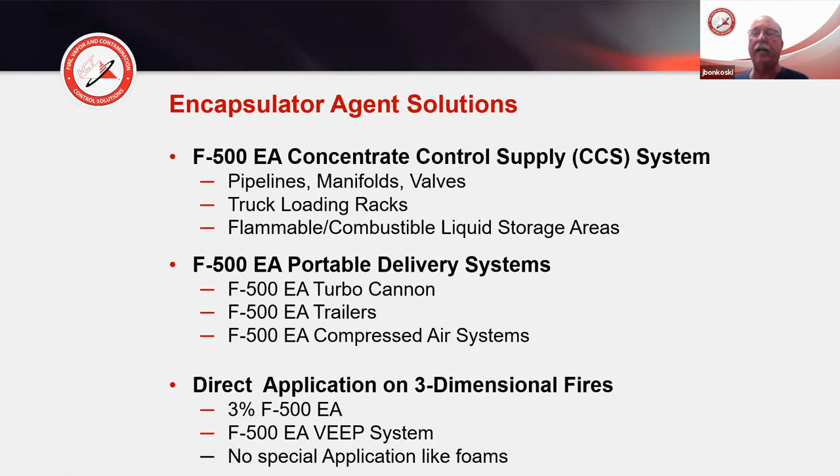But some of the things that we want to talk about as well is the three-dimensional aspect, that vapor encapsulation explosion protection system. How about if we have a gas being released into the atmosphere? With the monitoring that we have, we can detect those flammable vapors, and this VEEP system can activate and basically prevent fires and explosions from happening.

So as a little summary, we've talked about all the different unique features of an encapsulator agent, how it encapsulates hydrocarbons and polar solvents, different types of fuel, the unmatched ability for the heat reduction, the cancer-causing carcinogens, and how it works on those three-dimensional as well as two-dimensional fires.

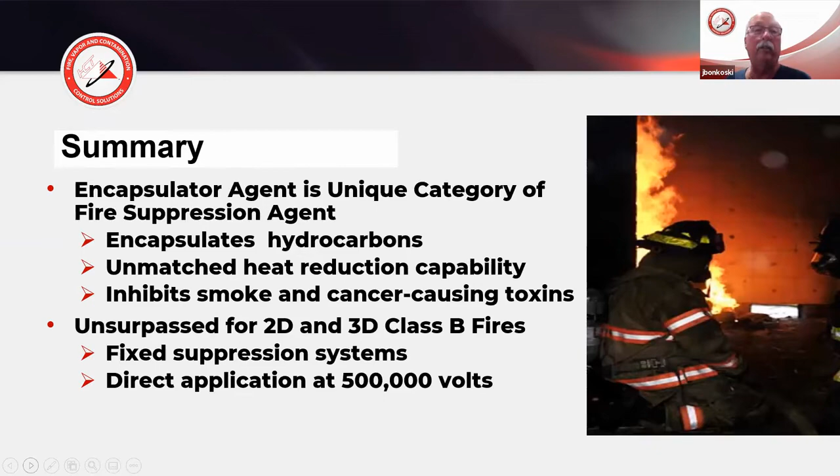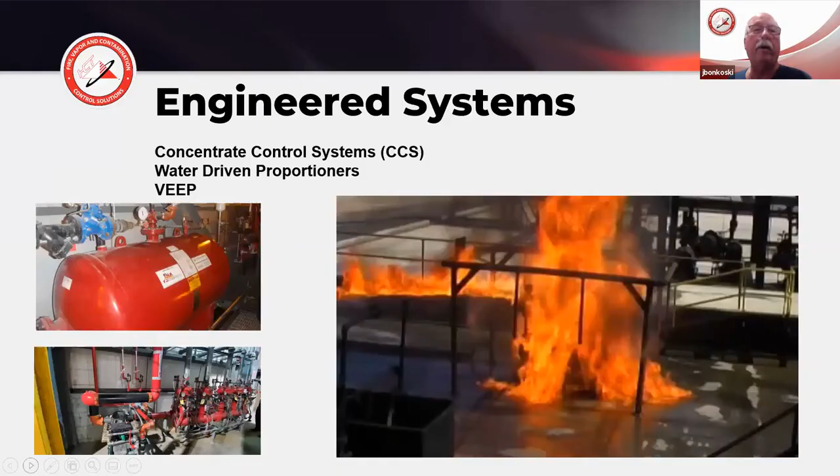And when we look at some of the equipment that it can be used with, current sprinkler systems: if you have a fire protection system and you want to improve its capabilities, yes, we can help out with systems that can be put in our concentrate control system. As you can see again, the video off to the right is the VEEP system.

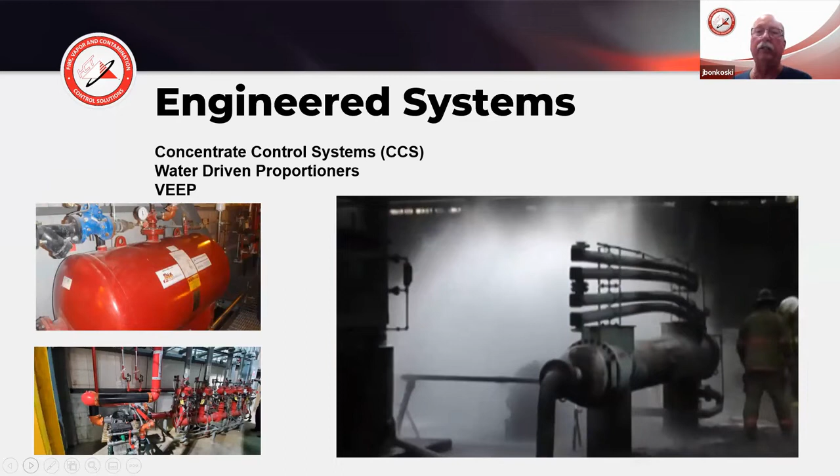But we've got concentrate control systems, and we've got water-driven proportioners, which are down on the bottom left, which can be used to protect transformers, manifolds, under turbine lube oil systems. The uses are endless as far as trying to help protect your facility or different types of facilities. Some of our other systems, we have our carts, our QAMUs, our quick attack mobile units.

And I mentioned earlier about the foam and the heat of the day and having that have an effect on the foam. Well, at this airport, it did just that. What happened was the heat of the day was causing the foam to break down, or what we call runoff. And in the process thereof, they had to reapply the mil-spec Class B foam every 6 to 7 minutes.

They used a total of about 1,200 to 1,500 gallons of mil-spec, which is probably some of the highest PFOA foam concentrates available. Anyway, they used about 1,200 to 1,500 gallons of that concentrate to try to keep the vapor suppressed. And they had a couple of issues that were of concern. One was a pump house, which they were afraid would be a source of ignition.

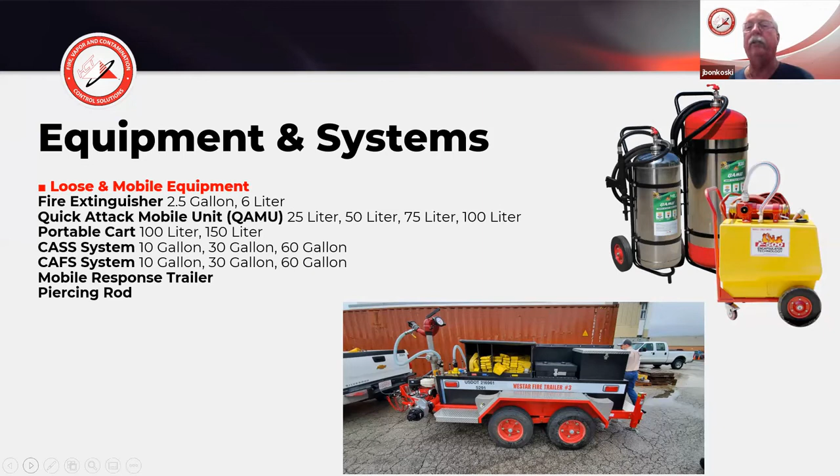They were on site for about an hour to an hour and a half, I'm told, and they deemed that the scene was mitigated and clean. So here, instead of having to dig up and spend days and days removing soil and replacing soil, that scene with 3,700 gallons of jet fuel was mitigated with 500 gallons.

So we start looking, because an encapsulator agent is different than foam. One of the things that we want to make sure we do is our consulting and offer the training so that it's used correctly and that it's not wasted. And that's what came in with that scene at that airport. I had done training with a fire department that also covers that particular airport. So they were well aware of how to use and apply F500 so that it would be that effective.